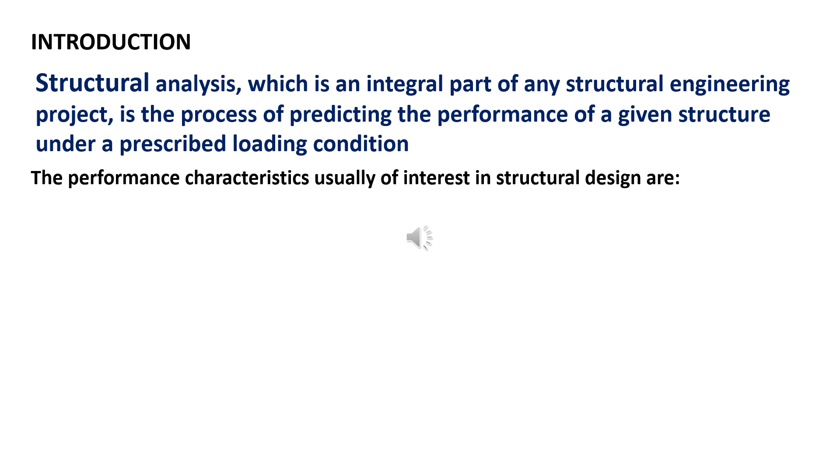The performance characteristics usually of interest in structural design are the following: first, we have the stresses or stress resultants, for example axial forces, shears, and bending moments; then followed by deflections.

Thus, the analysis of structure typically involves the determination of these quantities such as caused by the given loads and or other external effects such as support, displacement, and temperature changes.

Many commonly used structures such as beams, plane and space trusses, and rigid frames are classified as framed structures, also referred to as skeletal structures.

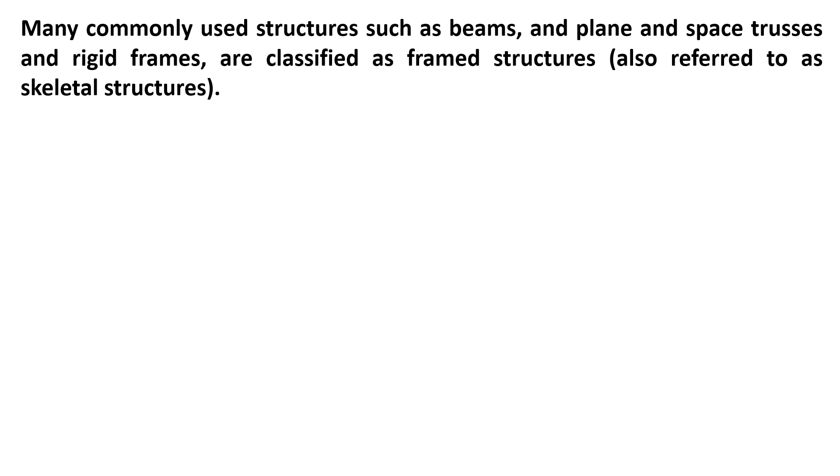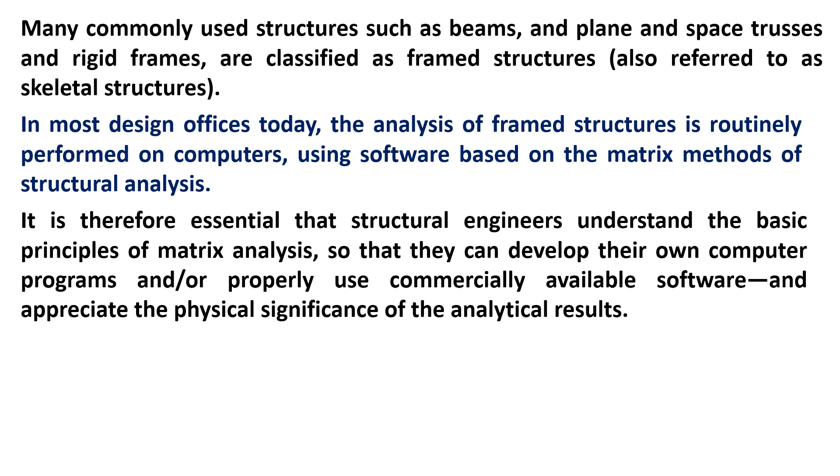In most design offices today, the analysis of frame structures is routinely performed on computers using software based on the matrix methods of structural analysis. It is therefore essential that structural engineers understand the basic principle of matrix analysis so that they can develop their own computer programs and/or properly use commercially available software and appreciate the physical significance of analytical results.

The objective of this text is to present the theory and computer implementation of matrix methods for the analysis of frame structures in static equilibrium.

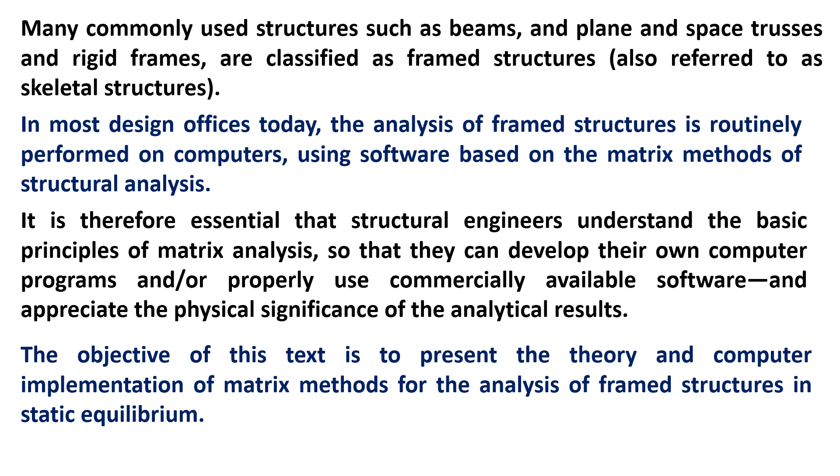Let us now have a historical background of the matrix analysis of structure. The theoretical foundation for matrix methods of structural analysis was laid by James Maxwell, who introduced the method of consistent deformations in 1864, and George Maney, who developed the slope deflection method in 1915. These classical methods are considered to be the precursors of the matrix flexibility and stiffness methods, respectively.

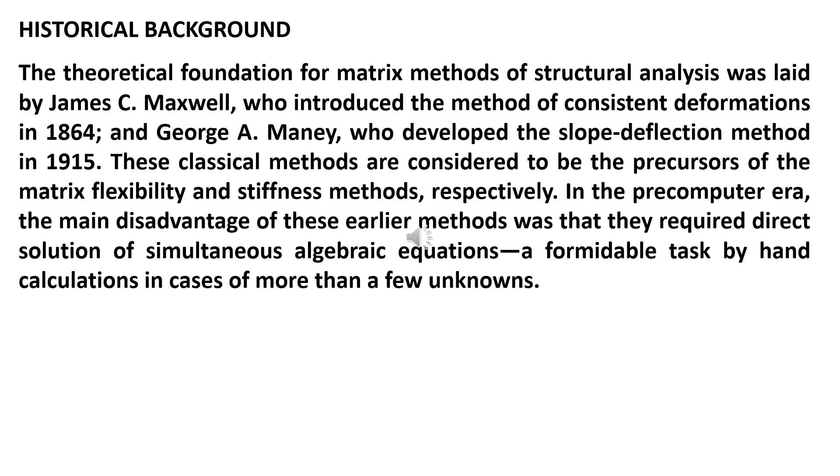In the pre-computer era, the main disadvantage of these earlier methods was that they required direct solution of simultaneous algebraic equations, a formidable task by hand calculations in cases of more than a few unknowns. The invention of computers in the late 1940s revolutionized structural analysis, as computers could solve large systems of simultaneous equations.

The analysis methods yielding solutions in that form were no longer at a disadvantage, but in fact were preferred because simultaneous equations could be expressed in matrix form and conveniently programmed for solutions on computers.

Mr. Levy is generally considered to have been the first to introduce the flexibility method in 1947 by generalizing the classical method of consistent deformations. Among the subsequent researchers who extended the flexibility method and expressed it in matrix form in the early 1950s were Falkenheimer, Langefors, and Denke. The matrix stiffness method was developed by Livesley in 1954.

In the same year, Argyris and Kelsey presented a formulation of matrix methods based on energy principles.

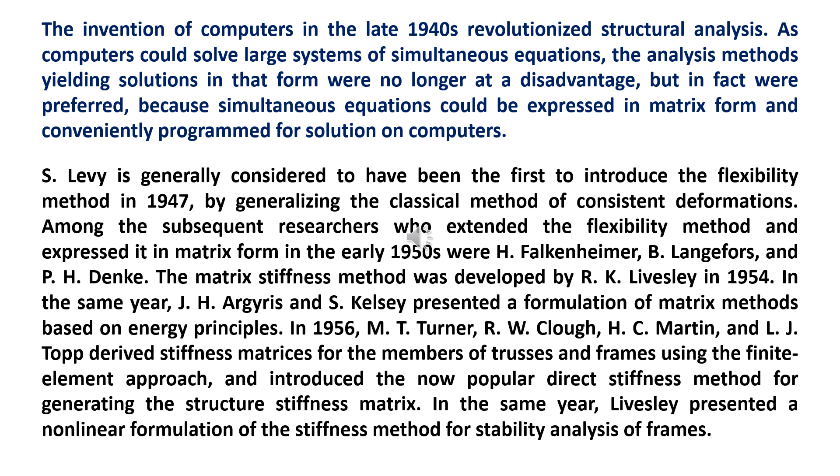In 1956, Turner, Clough, Martin, and Topp derived stiffness matrices for the members of trusses and frames using the finite element approach, and introduced the now popular direct stiffness method for generating the structure stiffness matrix. In the same year, Livesley presented a nonlinear formulation of the stiffness method for stability analysis of frames.

Since the middle of the 1950s, the development of matrix methods has continued at a tremendous pace, with research efforts in recent years directed mainly toward formulating procedures for the dynamic and nonlinear analysis of structures, and developing efficient computational techniques for analyzing large structures. Recent advances in these areas can be attributed to Mr. Archer, Birnstiel, Gallagher, Padlog, Przemieniecki, Wang, Wilson, and others.

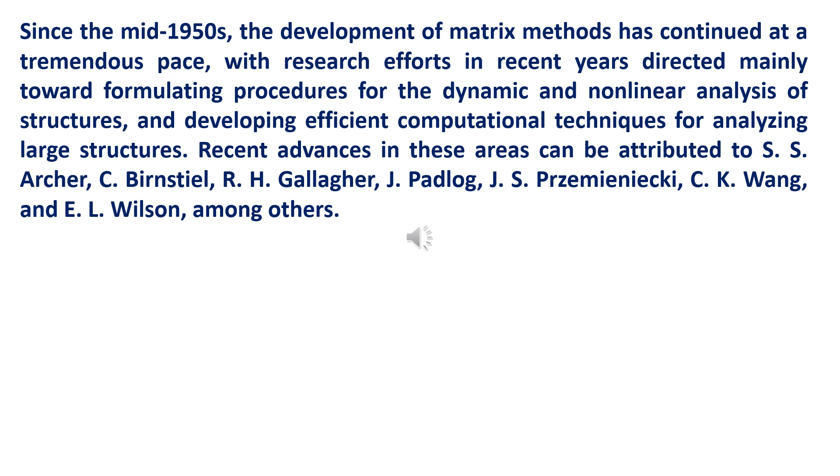We now have the classical, matrix, and finite element methods of structural analysis. To start with, let us have first the classical versus matrix methods.

As we develop matrix methods in subsequent chapters, learners who are familiar with classical methods of structural analysis will realize that both matrix and classical methods are based on the same fundamental principles, but that the fundamental relationships of equilibrium, compatibility, and member stiffness are now expressed in the form of matrix equations, so that numerical computations can be efficiently performed on a computer.

Most classical methods were developed to analyze particular types of structures, and since they were intended for hand calculations, they often involve certain assumptions to reduce the amount of computational effort required for analysis. The application of these methods usually requires an understanding on the part of the analyst of the structural behavior.

Consider, for example, the moment distribution method. This classical method can be used to analyze only beams and plane frames undergoing bending deformations. Deformations due to axial forces in the frames are ignored to reduce the number of independent joint translations.

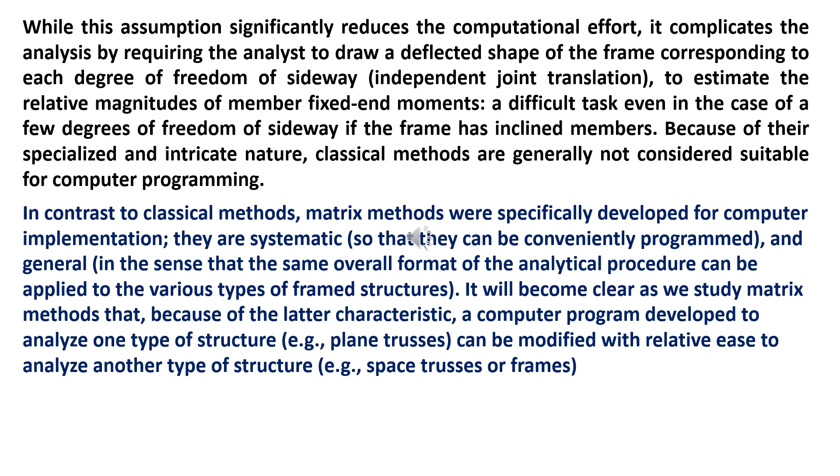As the analysis of large and highly redundant structures by classical methods can be quite time consuming, matrix methods are commonly used. However, classical methods are still preferred by many engineers for analyzing smaller structures because they provide better insight into the behavior of structures. Classical methods may also be used for preliminary designs, for checking the results of computerized analysis, and for deriving the member force displacement relations needed in the matrix analysis. Furthermore, a study of classical methods is considered essential for developing an understanding of structural behavior.

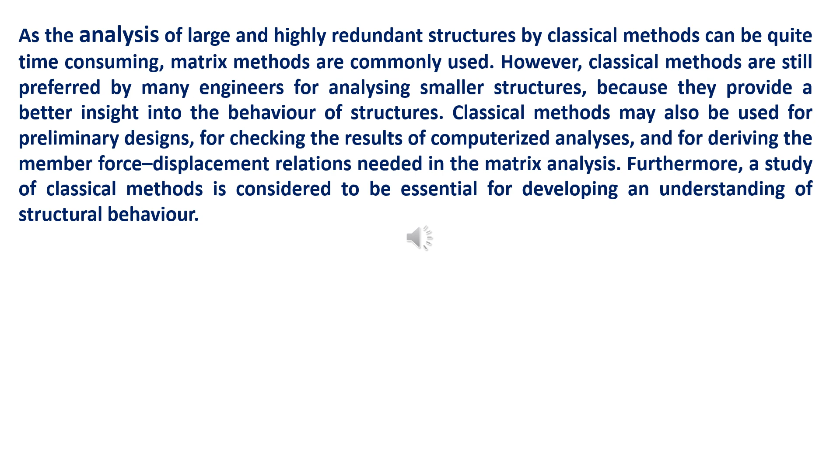Let us now look at matrix versus finite element methods.

Matrix methods can be used to analyze frame structures only. Finite element analysis, which originated as an extension of matrix analysis to surface structures, has now developed to the extent that it can be applied to structures and solids of practically any shape or form.

From a theoretical viewpoint, the basic difference between the two is that in matrix methods, the member force displacement relationships are based on the exact solutions of the underlying differential equations, whereas in finite element methods, such relations are generally derived by work energy principles from assumed displacement or stress functions.

Because of the approximate nature of its force displacement relations, finite element analysis generally yields approximate results. However, as will be shown in Chapters 3 and 5 of this subject, in the case of linear analysis of frame structures composed of prismatic uniform members, both matrix and finite element approaches yield identical results.

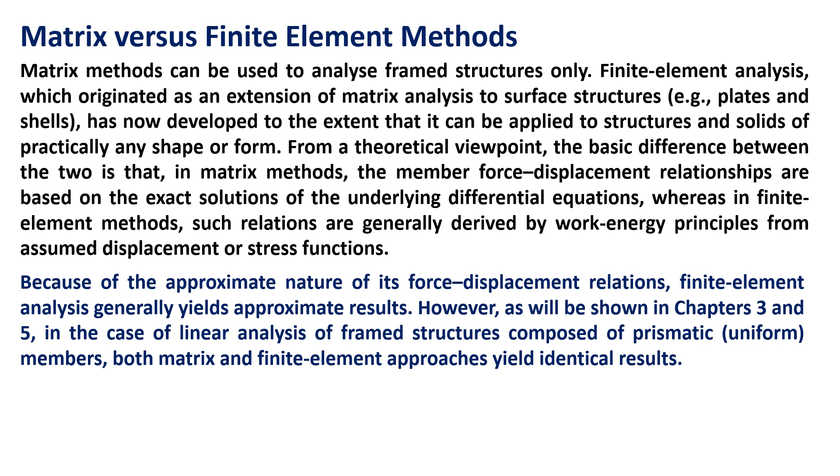Let us now discuss flexibility and stiffness methods. Two different methods can be used for the matrix analysis of structures: the flexibility method and the stiffness method. The flexibility method, also referred to as the force or compatibility method, is essentially a generalization in matrix form of the classical method of consistent deformations.

In this approach, the primary unknowns are the redundant forces, which are calculated first by solving the structure's compatibility equations. Once the redundant forces are known, the displacements can be evaluated by applying the equations of equilibrium and the appropriate member force displacement relations.

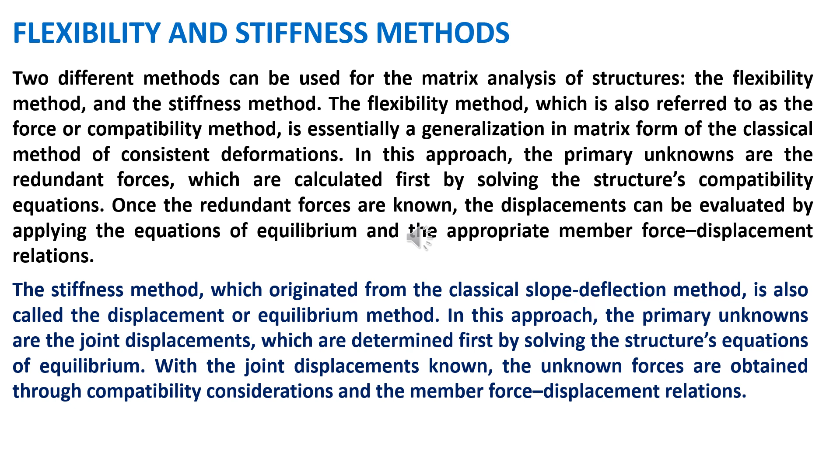The stiffness method, which originated from the classical slope deflection method, is also called the displacement or equilibrium method. In this approach, the primary unknowns are the joint displacements, which are determined first by solving the structure's equations of equilibrium. With the joint displacements known, the unknown forces are obtained through compatibility considerations and the member force displacement relations.

Although either method can be used to analyze frame structures, the flexibility method is generally convenient for analyzing small structures with few redundants. This method may also be used to establish member force displacement relations needed to develop the stiffness method. The stiffness method is more systematic and can be implemented more easily on computers. Therefore, it is preferred for the analysis of large and highly redundant structures.

Most of the commercially available software for structural analysis is based on the stiffness method. In this text, we focus our attention mainly on the stiffness method, with emphasis on a particular version known as the direct stiffness method, which is currently used in professional practice.

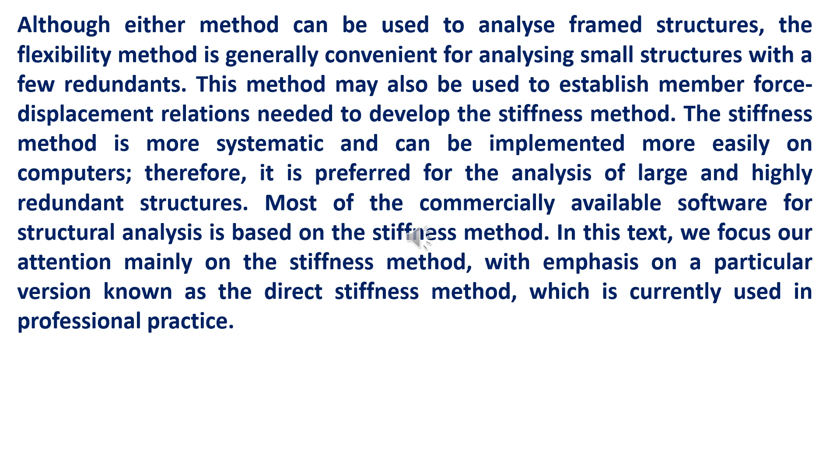We now turn to the classification of frame structures. Frame structures are composed of straight members whose lengths are significantly larger than their cross-sectional dimensions. Common frame structures can be classified into six basic categories based on the arrangement of their members and the types of primary stresses that may develop in their members under major design loads.

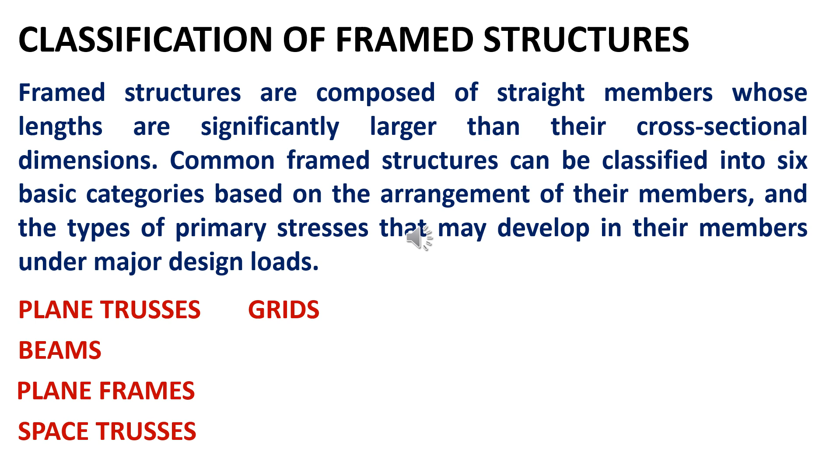First, we have the plane trusses, followed by the beams, and then we also have the plane frames, followed by the space trusses, and then we also have the grids, and lastly, we have the space frames.

Let's now have the definition of plane trusses. A truss is defined as an assemblage of straight members connected at their ends by flexible connections and subjected to loads and reactions only at the joints or connections. The members of such an ideal truss develop only axial forces when the truss is loaded.

In real trusses, such as those commonly used for supporting roofs and bridges, the members are connected by bolted or welded connections that are not perfectly flexible, and the dead weights of the members are distributed along their lengths. Because of these and other deviations from idealized conditions, truss members are subjected to some bending and shear. However, in most trusses these secondary bending moments and shears are small compared to the primary axial forces, and are usually not considered in their designs.

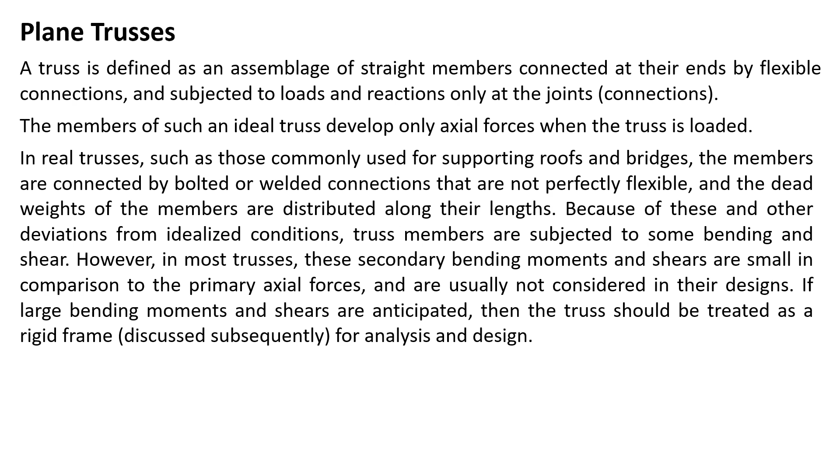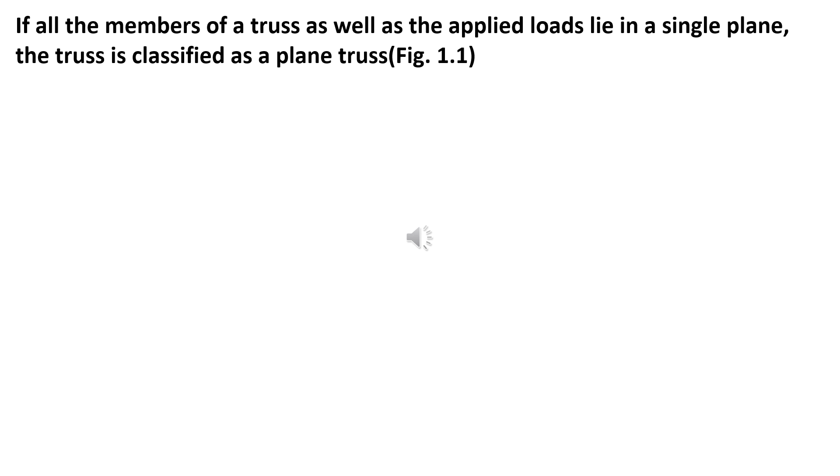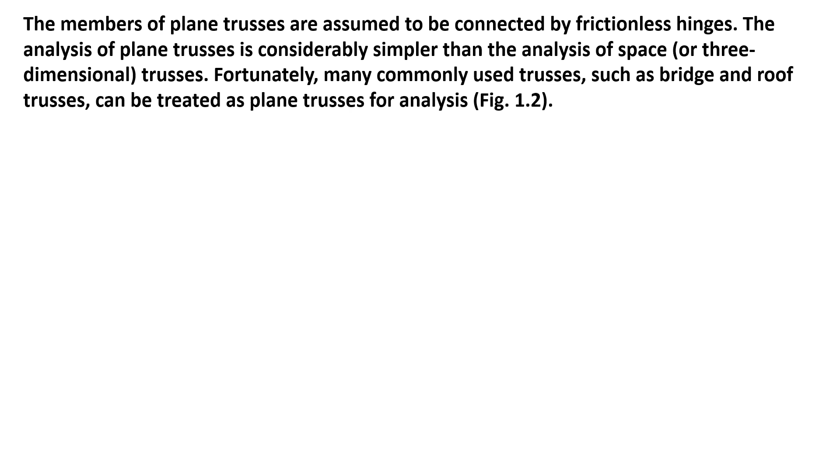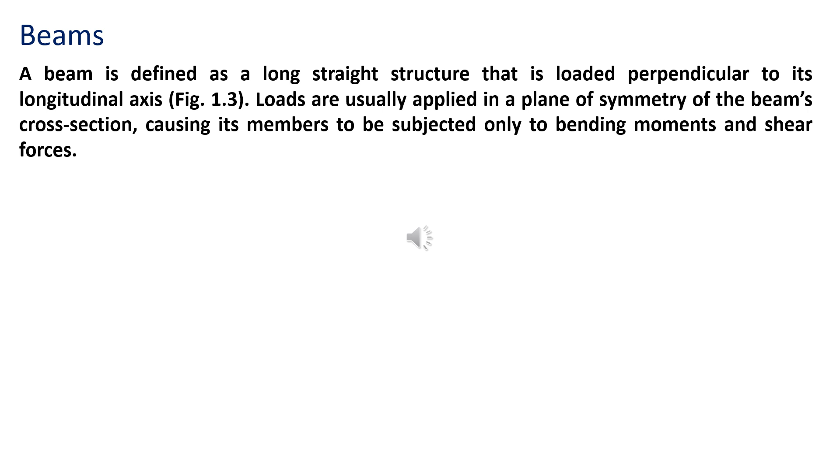Of course, we also have beams. A beam is defined as a long straight structure that is loaded perpendicular to its longitudinal axis. Loads are usually applied in a plane of symmetry of the beam's cross-section, causing its members to be subjected only to bending moments and shear forces. As shown below, Figure 1.3 is an example of a beam.

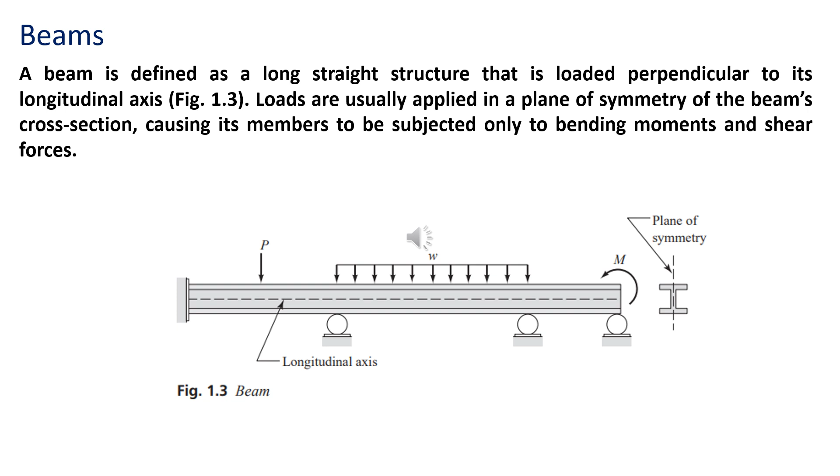Let's now have the definition of plane frames. Frames, also referred to as rigid frames, are composed of straight members connected by rigid and/or flexible connections, as shown in Figure 1.4 below. Unlike trusses, which are subjected to external loads only at the joints, loads on frames may be applied on the joints as well as on the members.

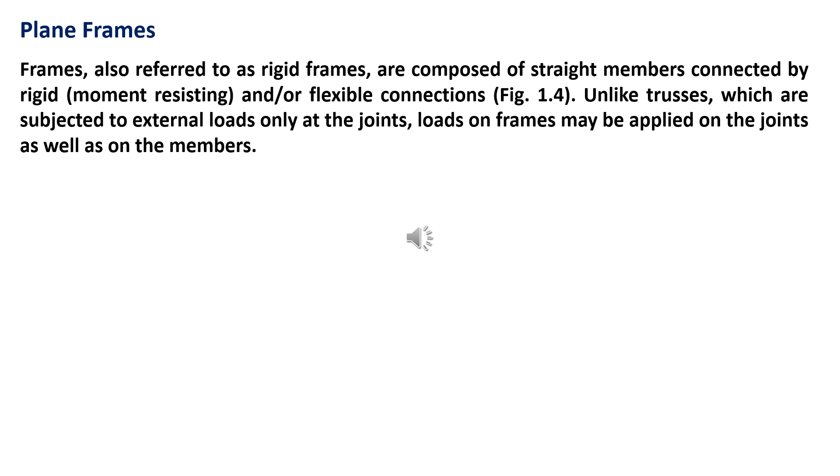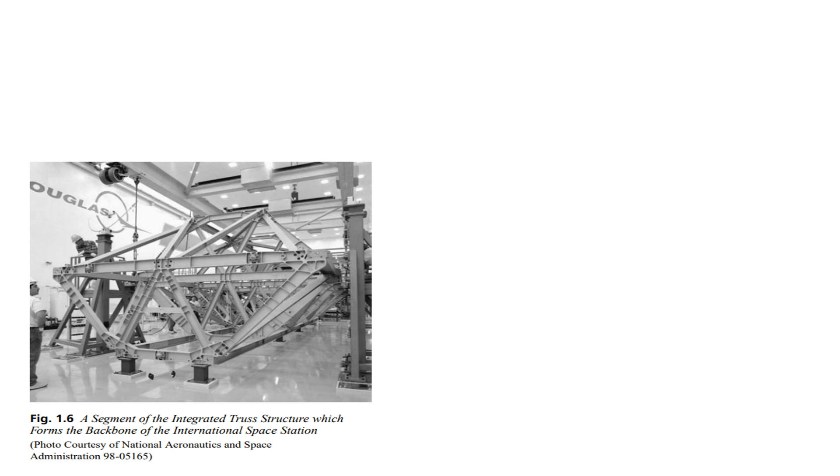Shown in Figure 1.6, this is an example of a segment of the integrated truss structure which forms the backbone of the International Space Station. And as shown below is an example of a grid, which is actually our Figure 1.7.

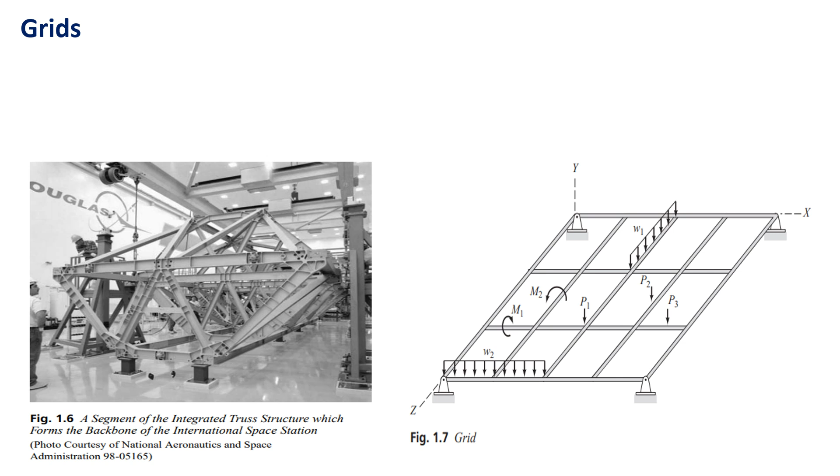Now let us talk about grids. How do we define grids? A grid, like a plane frame, is composed of straight members connected together by rigid and/or flexible connections to form a plane framework. The main difference between the two types of structures is that plane frames are loaded in the plane of the structure, whereas the loads on grids are applied in the direction perpendicular to the structure's plane.

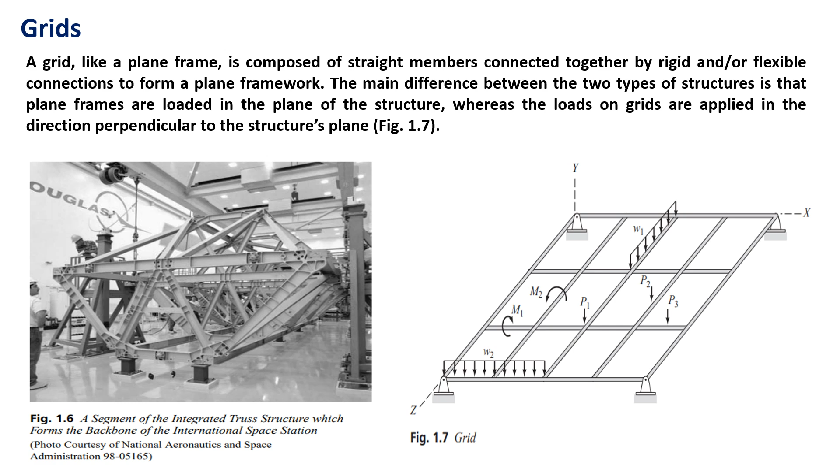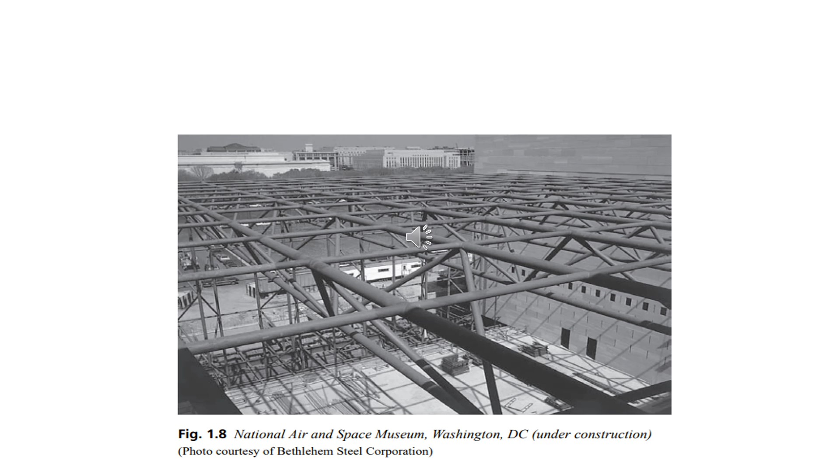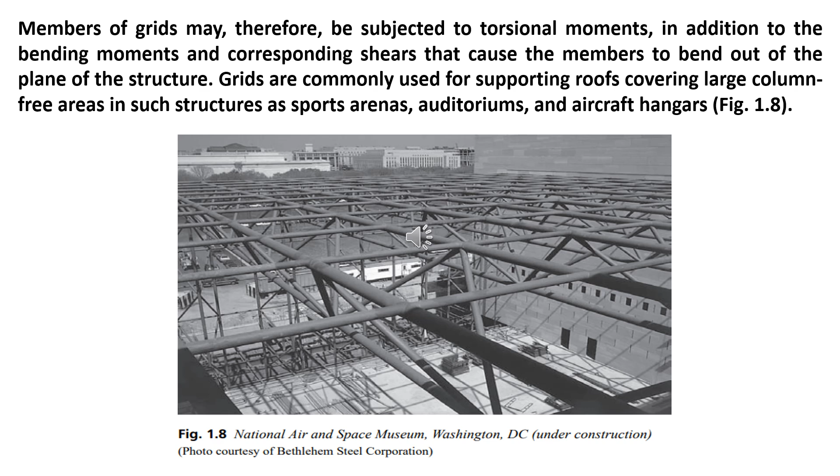Members of grids may therefore be subjected to torsional moments in addition to the bending moments and corresponding shears that cause the members to be bent out of the plane of the structure. Grids are commonly used for supporting roofs, covering large column-free areas in such structures as sports arenas, auditoriums, and aircraft hangars.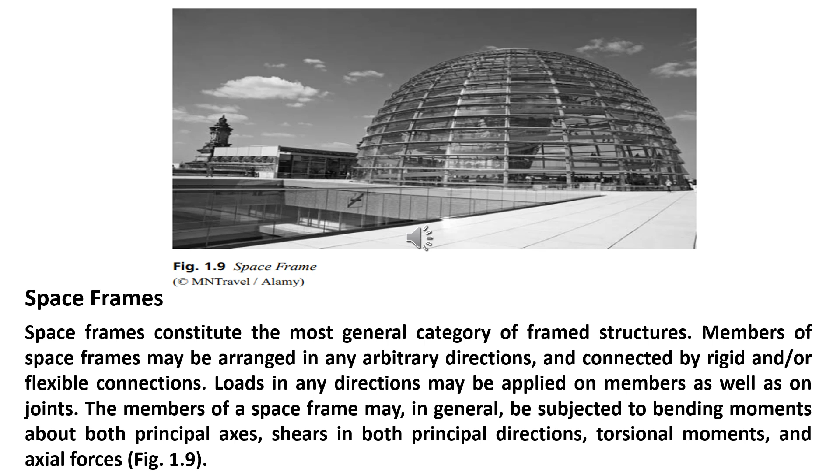Let us now talk about analytical models. The first, and perhaps most important, step in the analysis of a structure is to develop its analytical model. An analytical model is an idealized representation of a real structure for the purpose of analysis. Its objective is to simplify the analysis of a complicated structure by discarding much of the detail about connections, members, etc., that is likely to have little effect on the structure's behavioral characteristics of interest, while representing as accurately as practically possible the desired characteristics.

It is important to note that the structural response predicted from an analysis is valid only to the extent that the analytical model represents the actual structure.

For frame structures, the establishment of analytical models generally involves consideration of issues such as whether the actual three-dimensional structure can be subdivided into plane structures for the analysis, and whether to idealize the actual bolted or welded connection as pins, rigid, or semi-rigid joints.

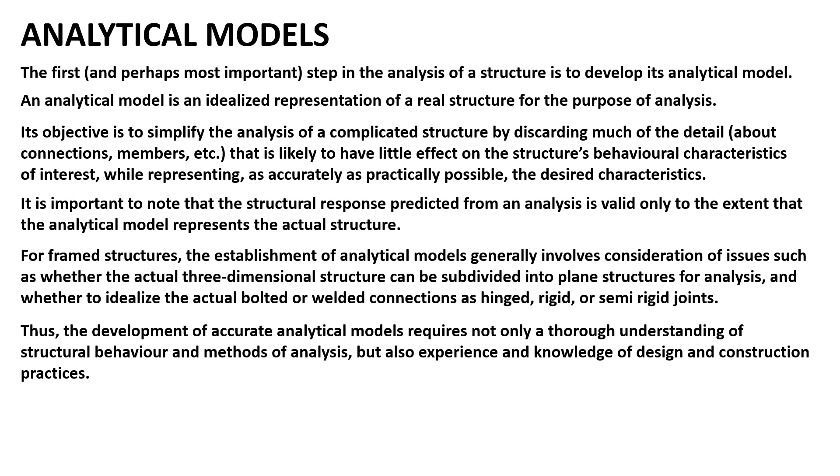Thus, the development of accurate analytical models requires not only a thorough understanding of structural behavior and methods of analysis, but also experience and knowledge of design and construction practices.

In matrix methods of analysis, a structure is modeled as an assemblage of straight members connected at their ends to joints.

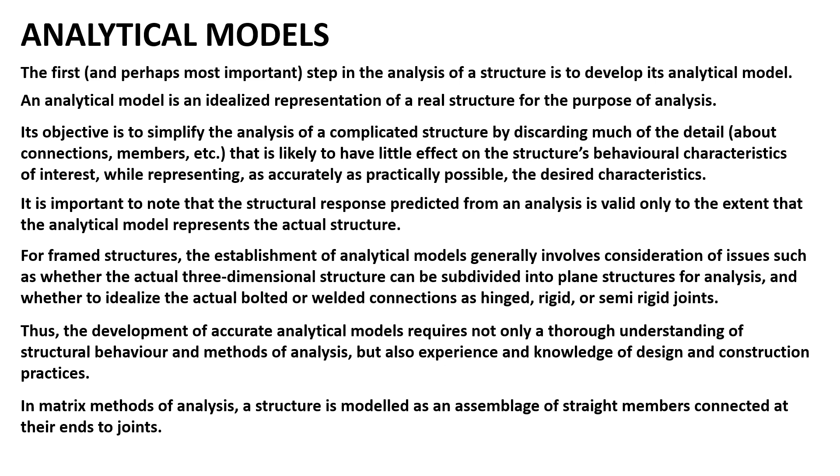A member is defined as part of the structure for which the member force displacement relationships to be used in the analysis are valid. The member force displacement relationships for the various types of frame structures will be derived in subsequent chapters.

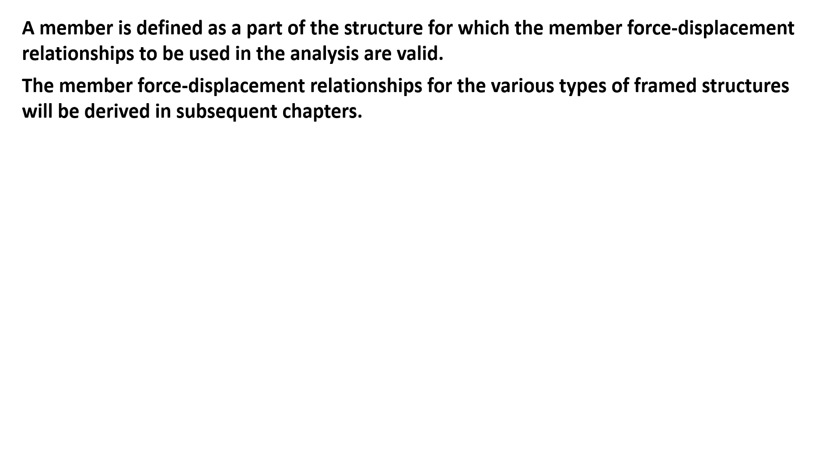A joint is defined as a structural part of infinitesimal size to which the ends of the members are connected. In finite element terminology, the members and joints of structures are generally referred to as elements and nodes respectively.

Supports for frame structures are commonly idealized as fixed supports, which do not allow any displacement, pin supports which allow rotation but prevent translation, or roller or link supports which prevent translation in only one direction.

Other types of restraints, such as those which prevent rotation but permit translation in one or more directions, can also be considered in an analysis, as discussed in subsequent chapter.

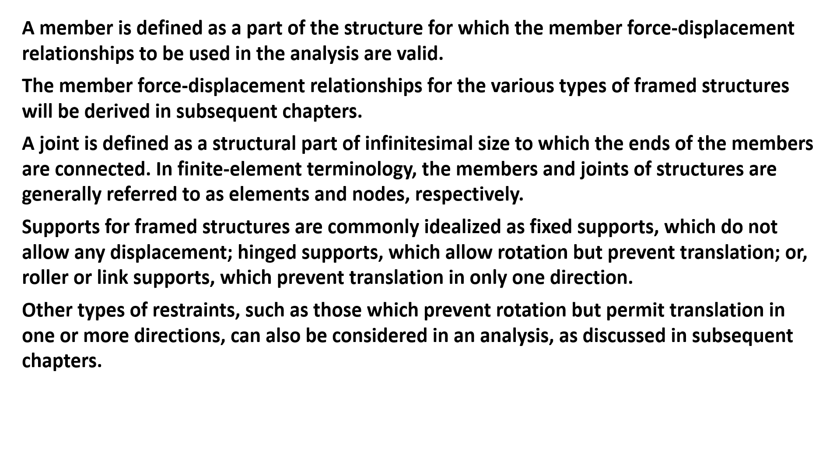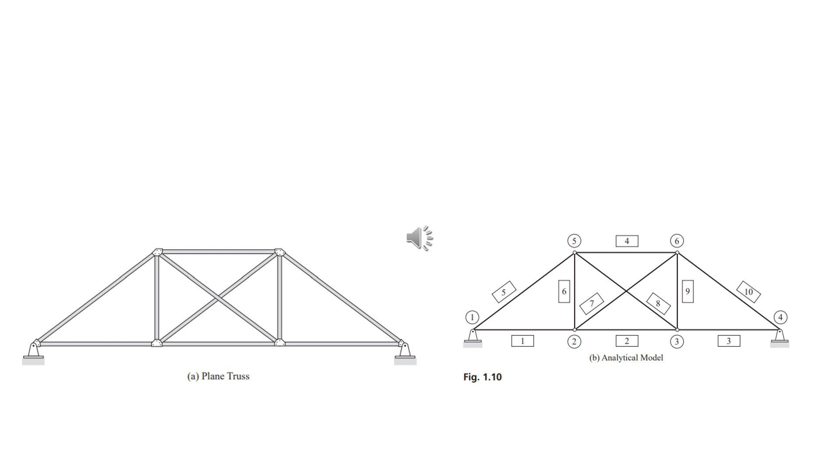As shown below is an example of a figure of a plane truss. And then for the second one, we have a figure of analytical model example.

With this, let us now talk about the line diagrams. The analytical model of a structure is represented by a line diagram, on which each member is depicted by a line coinciding with its centroidal axis.

The member dimensions and the size of connections are not shown. Rigid joints are usually represented by points, and hinge joints by small circles at the intersections of members. Each joint and member of the structure is identified by a number.

For example, the analytical model of the plane truss of figure 1.10a is shown in figure 1.10b, in which the joint numbers are enclosed within circles to distinguish them from the member numbers enclosed within rectangles.

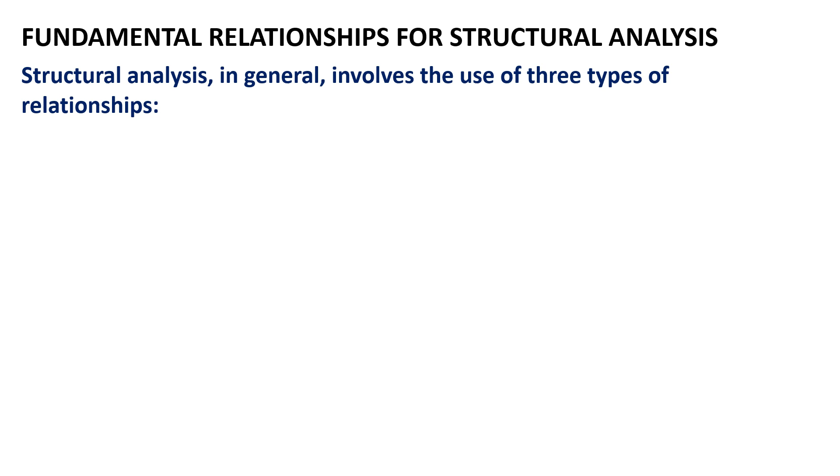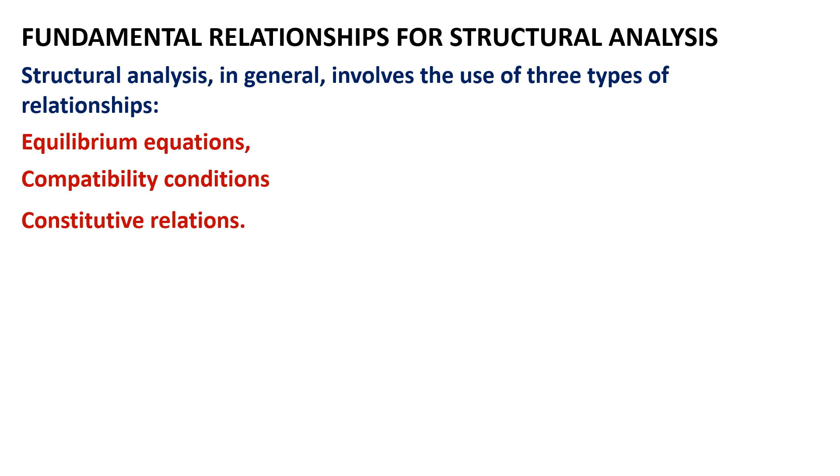Let us now have the fundamental relationships for structural analysis. Structural analysis in general involves the use of three types of relationships. At first, we have the equilibrium equations. Second, we have the compatibility conditions. And then finally, we have the constitutive relations.

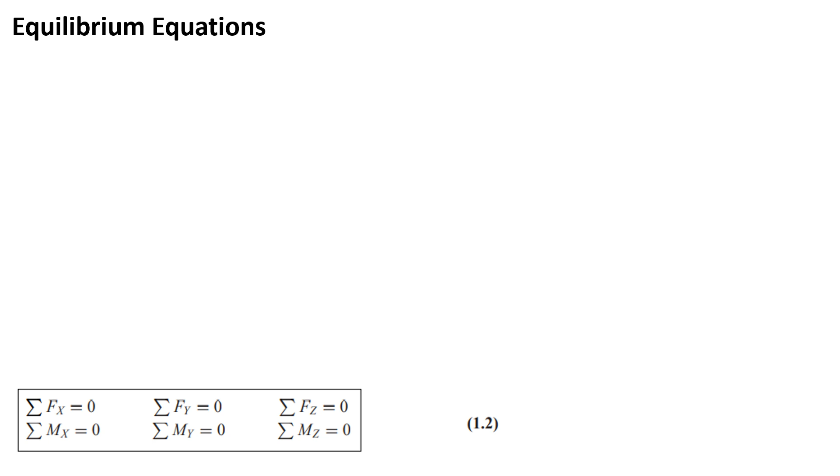For the first one, we have our equilibrium equations. A structure is considered to be in equilibrium if, initially at rest, it remains at rest when subjected to a system of forces and couples. If a structure is in equilibrium, then all of its members and joints must also be in equilibrium.

Recall from statics that for a plane, two-dimensional structure lying in the x and y plane, and subjected to a coplanar system of forces and couples, as we can see in figure 1.11, the necessary and sufficient conditions for equilibrium can be expressed in Cartesian xy coordinates as shown below.

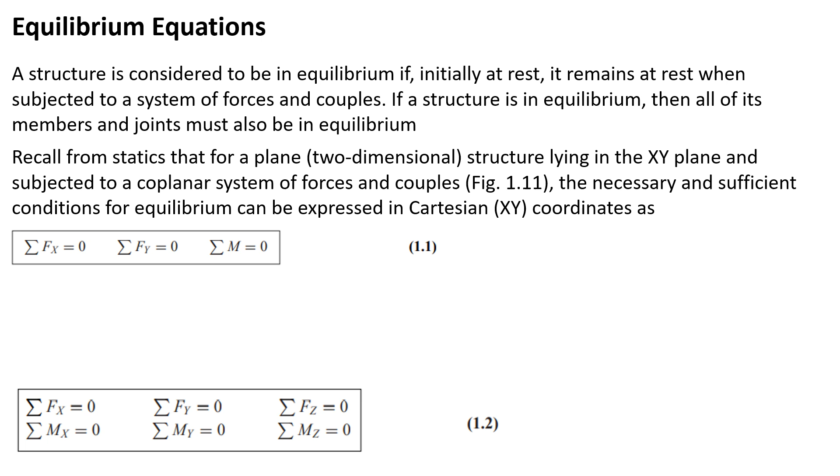We now have the summation of forces horizontal, or summation fx equals 0, summation of all forces vertical, or summation fy equals 0, and the summation of all the moments equals 0, or summation m equals 0. These equations are referred to as the equations of equilibrium for plane structures.

For a space, three-dimensional structure, subjected to a general three-dimensional system of forces and couples as shown in figure 1.12, the equations of equilibrium are expressed as summation fx equals 0, summation fy equals 0, summation fz equals 0, summation mx equals 0, summation my equals 0, and summation mz equals 0.

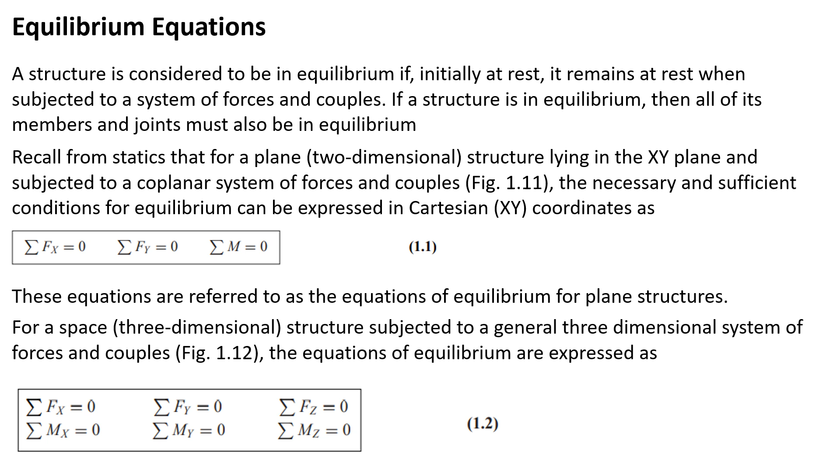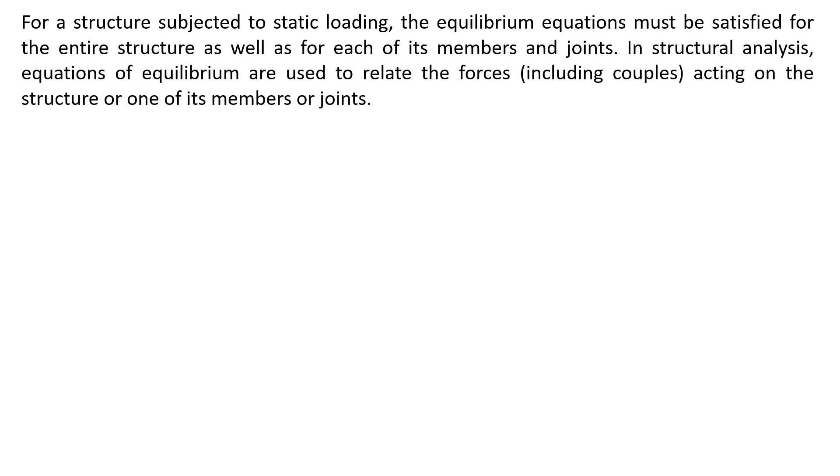For a structure subjected to static loading, the equilibrium conditions must be satisfied for the entire structure as well as for each of its members and joints. In structural analysis, equations of equilibrium are used to relate the forces acting on the structure or one of its members or joints.

For the second one, we have the compatibility conditions. Compatibility conditions relate the deformations of structures so that its various parts fit together without any gaps or overlaps. This condition ensures that the deformed shape of the structure is continuous and is consistent with the support conditions.

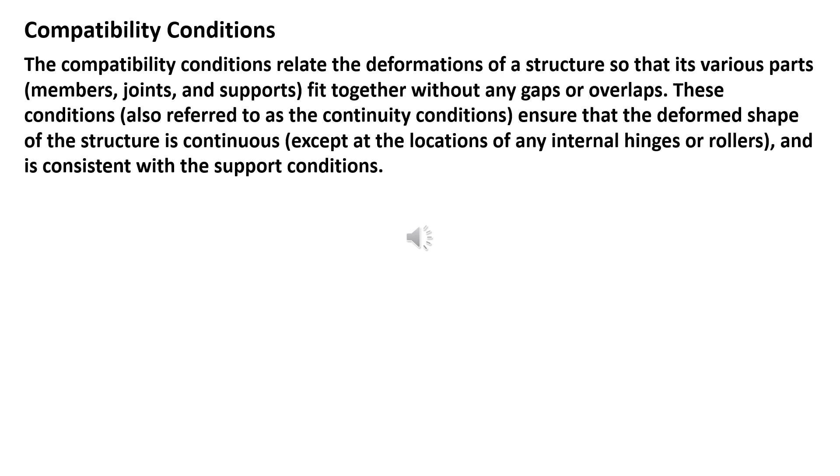When analyzing a structure, the compatibility conditions are used to relate member displacement to joint displacement, which in turn are related to the support conditions.

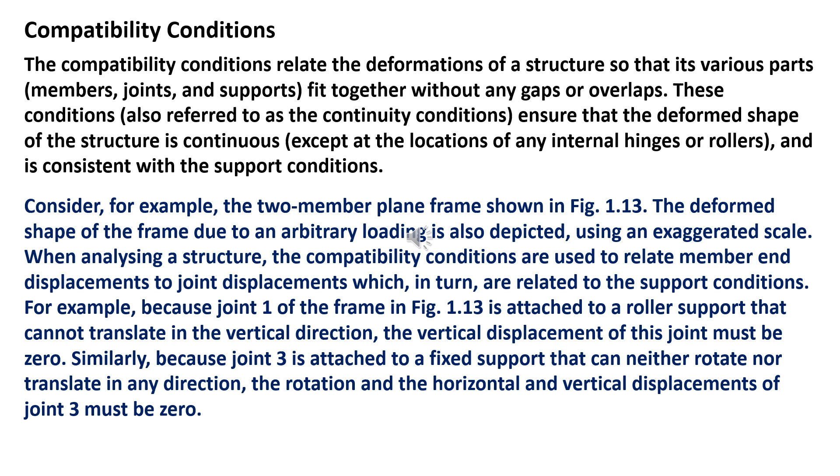The displacement of the ends of members are related to the joint displacement by the compatibility requirement that the displacement of a member end must be the same as the displacement of the joint to which the member end is connected. Thus, as shown in figure 1.13, because joint 1 of the example frame displaces to the right by a distance d sub 1...

and rotates clockwise by an angle theta 1, the left end of horizontal member 1, attached to joint 1, must also translate to the right by distance d sub 1 and rotate clockwise by angle theta 1. Similarly, because the displacement of joint 2 consists of translations d sub 2 to the right and d sub 3 downward, and the counterclockwise rotation theta 2, the right end of the horizontal member and the top end of the vertical member connected to joint 2 must also undergo the same displacement.

The bottom end of the vertical member, however, is not subjected to any displacement, because joint 3, to which this particular member end is attached, can neither rotate nor translate in any direction.

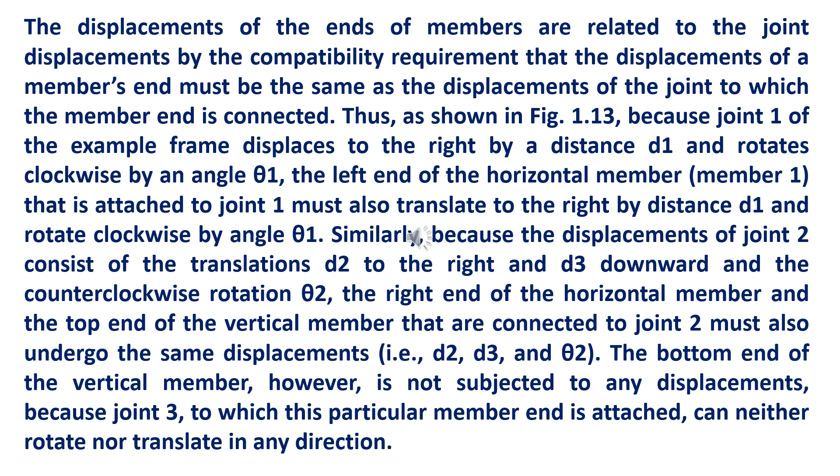Let's now have a view of our figure 1.13.

Finally, compatibility requires that the deflected shapes of the members of a structure be continuous, except at any internal hinges or rollers, and be consistent with the displacement at the corresponding ends of the members.

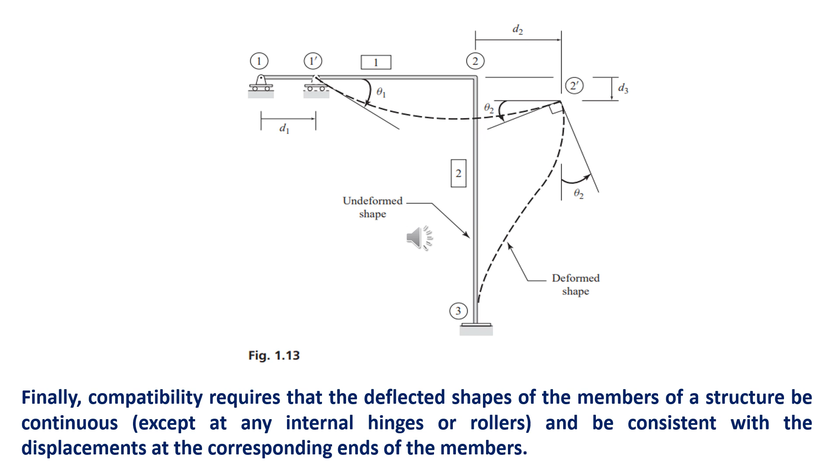For the third one, we have the constitutive relations. The constitutive relations, also referred to as the stress-strain relations, describe the relationships between the stresses and strains of a structure in accordance with the stress-strain properties of the structural material.

As discussed previously, the equilibrium equations provide relationships between the forces, whereas the compatibility conditions involve only deformations. The constitutive relations provide a link between the equilibrium equations and compatibility conditions that is necessary to establish the load-deformation relationships for a structure or a member.

In the analysis of frame structures, the basic stress-strain relations are used, along with member equilibrium and compatibility equations, to establish relationships between the forces and displacements at the ends of a member. The member force-displacement relations thus obtained are then treated as the constitutive relations for the entire structure and are used to link the structure's equilibrium and compatibility equations,

thereby yielding the load-deformation relationships for the entire structure. These load-deformation relations can then be solved to determine the deformations of the structure due to given loading.

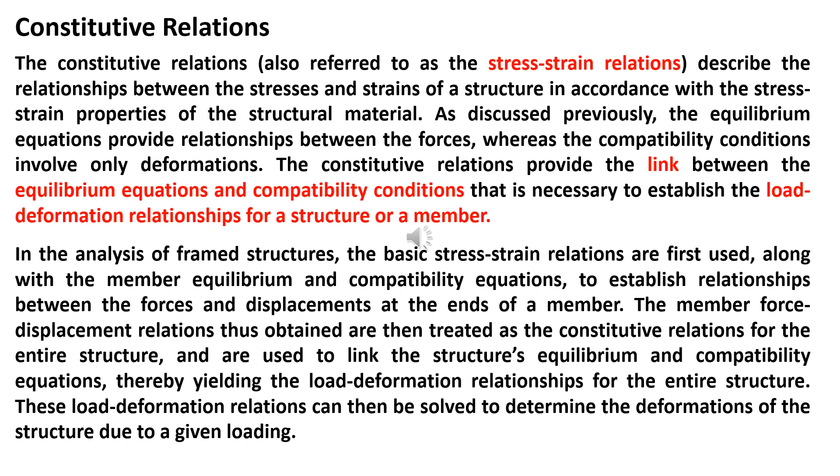The matrix methods presented in this text are formulated by the direct application of the equilibrium, compatibility, and constitutive relationships. However, to introduce readers to the finite element method and familiarize them with the application of work-energy principles, we also derive the member force-displacement relations for plane structures by a finite element approach that involves a work-energy principle known as the principle of virtual work.

In the following paragraphs, we review two statements of this principle pertaining to rigid bodies and deformable bodies for future reference. Let's now have the virtual work for rigid bodies, or the principle of virtual work for rigid bodies.

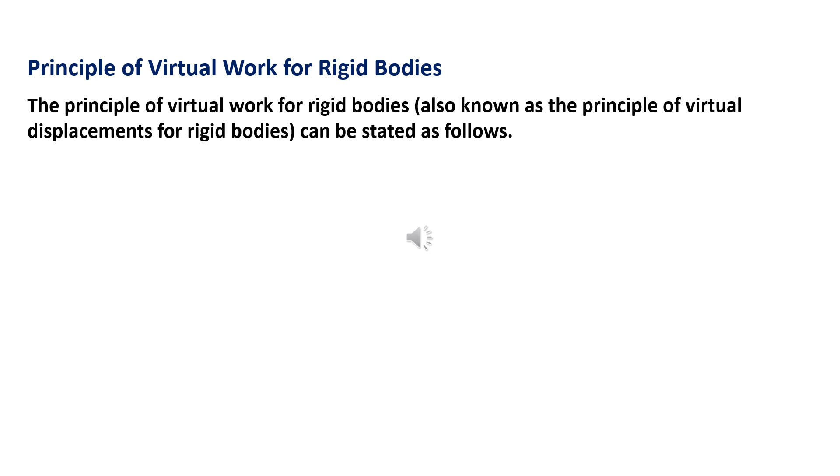The principle of virtual work for rigid bodies, also known as the principle of virtual displacement for rigid bodies, can be stated as follows: if a rigid body which is in equilibrium under a system of forces is subjected to any small virtual rigid body displacement, the virtual work done by the external forces is zero. In the foregoing statement, the term virtual simply means imaginary, not real.

Consider, for example, the cantilever beam shown in Figure 1.14a. The free body diagram of the beam is shown in Figure 1.14b, in which Px and Py are the components of the external load P in the x and y directions respectively, and R1, R2, and R3 represent the reactions at the fixed support 1.

Note that the beam is in equilibrium under the action of the forces Px, Py, R1, and R2, and the couple R3. Now, imagine that the beam is given an arbitrarily small virtual rigid body displacement from its initial equilibrium position 1-2 to another position 1-2, as shown in Figure 1.14c.

As this figure indicates, the total virtual displacement of the beam can be decomposed into rigid body translations in the x and y directions respectively, and a rigid body rotation about point 1. Note that a symbol like this is used here to identify the virtual quantities.

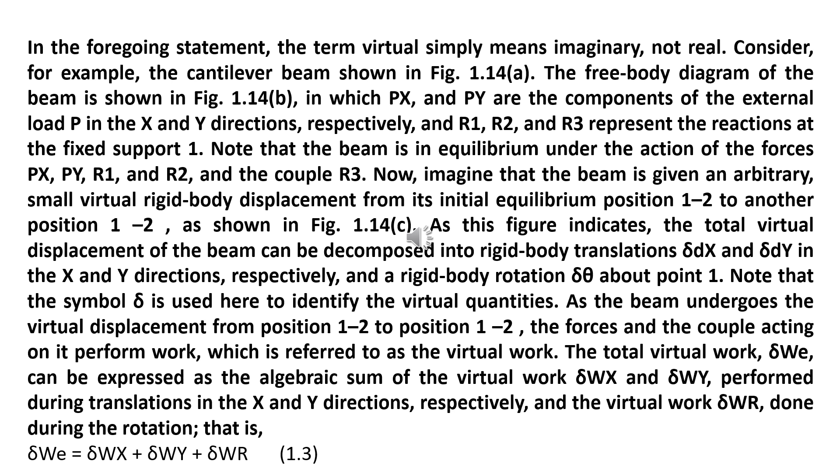Equation 1.4. Similarly, the virtual work done during the virtual translation is given by the formula shown below, equation 1.5. And the virtual work done by the forces and the couple during the small virtual rotation can be expressed as shown below, equation 1.6.

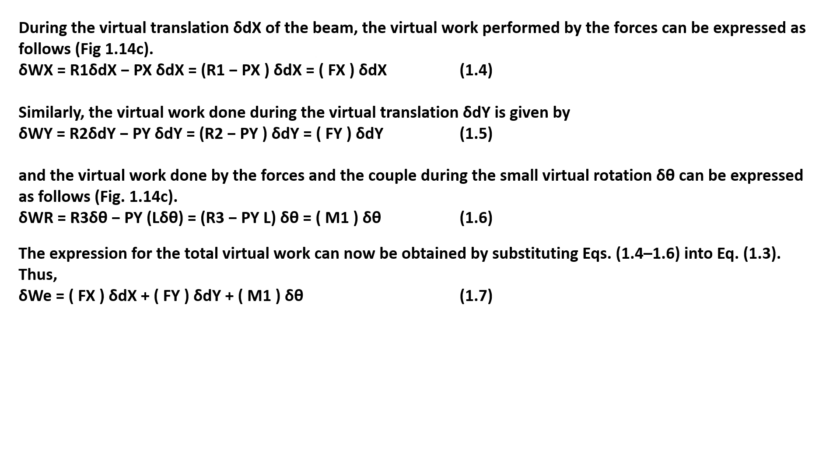The expression for the total virtual work can now be obtained by substituting equations 1.4 to 1.6 into equation 1.3. Thus, we have now the equation below, 1.7.

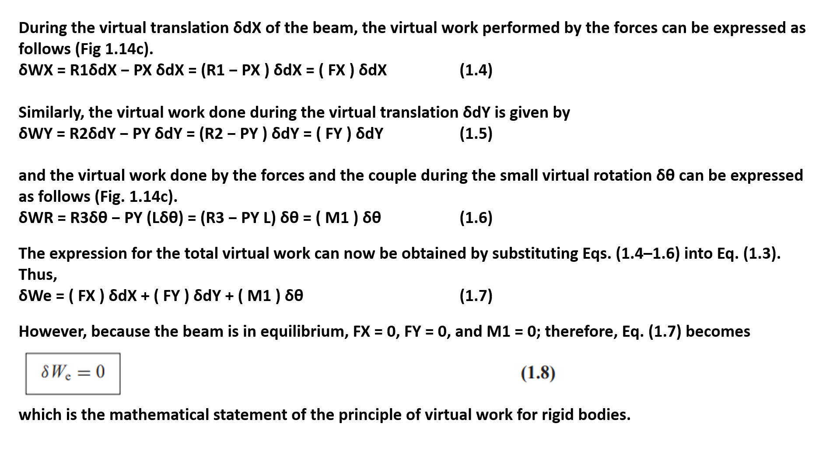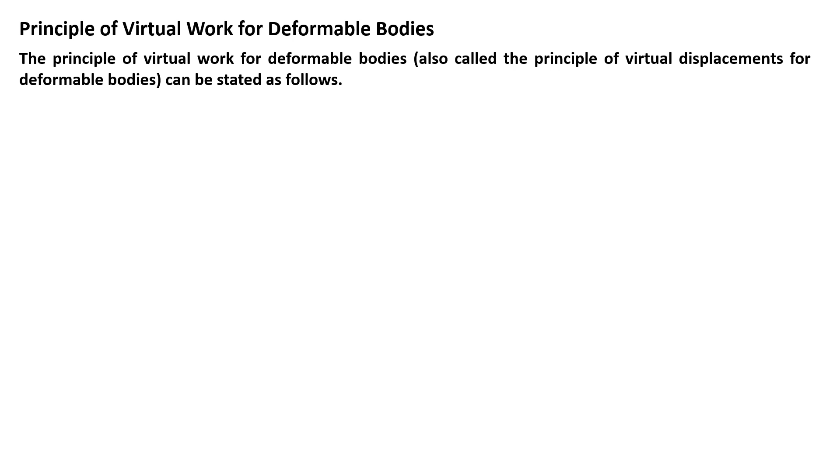Now let us have the principle of virtual work for deformable bodies. The principle of virtual work for deformable bodies, also known as the principle of virtual displacement for deformable bodies, can be stated as follows. If a deformable structure which is in equilibrium under a system of forces and couples is subjected to any virtual

displacement consistent with the support and continuity conditions of the structure, then the virtual external work done by the real external forces acting through the virtual external displacement is equal to the virtual strain energy stored in the structure.

To demonstrate the validity of this principle, consider the two-member truss as shown in Figure 1.15a, which is in equilibrium under the action of an external load P. The free body diagram of joint 3 of the truss is shown in Figure 1.15b.

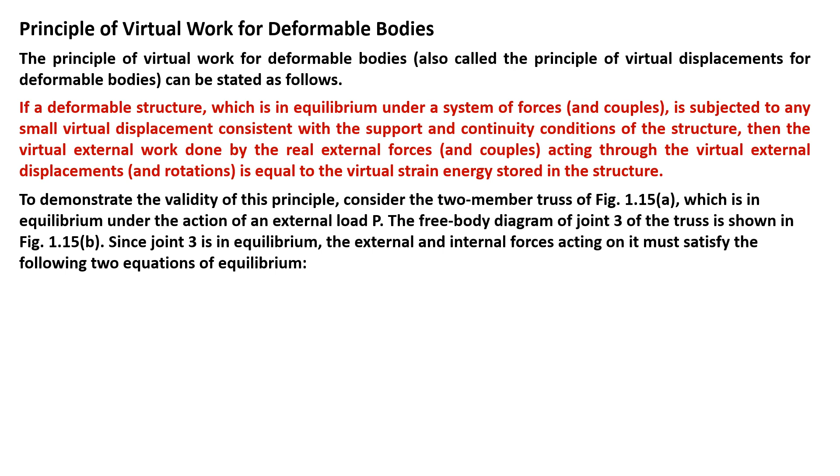Since joint 3 is in equilibrium, the external and internal forces acting on it must satisfy the following two equations of equilibrium. First, we have summation Fx equal to 0, wherein negative F sub 1 sine theta 1 plus F sub 2 sine theta 2 is equal to 0, followed by the second one, summation forces vertical equals 0, or summation Fy equals 0, F1 cosine theta 1 plus F2 cosine theta 2 minus P is equal to 0,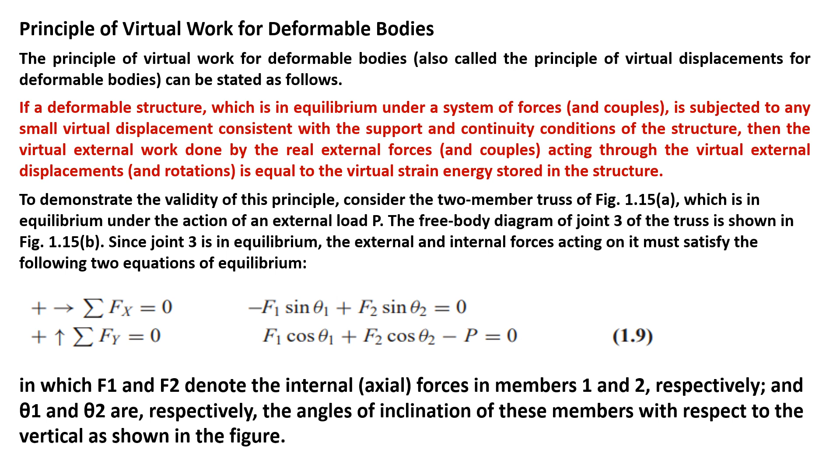in which F1 and F2 denote the internal axial forces in members 1 and 2, respectively, and theta 1 and theta 2 are, respectively, the angles of inclination of these members with respect to the vertical, as shown in the figure.

As mentioned here, we now have to imagine that joint 3 is given a small virtual compatible displacement in the downward direction, as shown in figure 1.15 letter A. It should be noted that this virtual displacement is consistent with the support conditions of the truss in the sense that joints 1 and 2, which are attached to supports, are not displaced.

Because the reaction forces at joints 1 and 2 do not perform any work, the total virtual work for the truss is equal to the algebraic sum of the virtual work of the forces acting at joint 3. That's from figure 1.15 letter B.

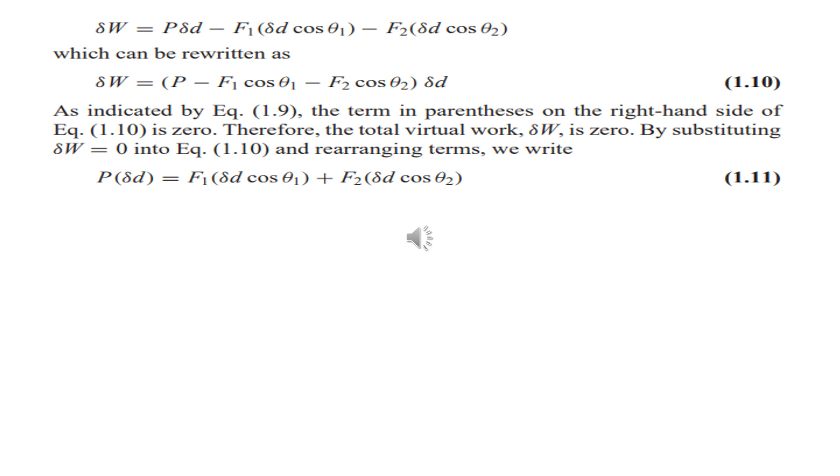Well, and then, as shown in the picture, we have the summary of our two equations, equation 1.10 and equation 1.11, in which the quantity on the left-hand side represents the virtual external work performed by the real external force P acting through the virtual external displacement.

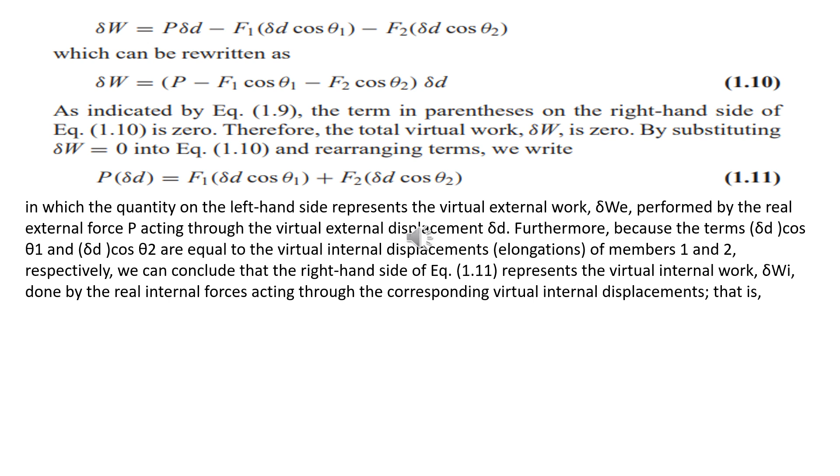Furthermore, because the terms are equal to the virtual internal displacement elongations of members 1 and 2, respectively, we can conclude that the right-hand side of equation 1.11 represents the virtual internal work done by the real internal forces acting through the corresponding virtual internal displacement. We actually have the summary of two equations, equation 1.12 and equation 1.13.

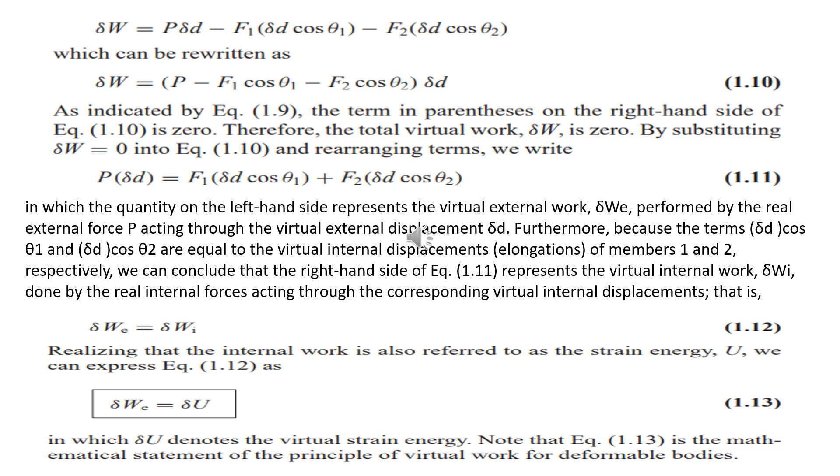For computational purposes, it is usually convenient to express equation 1.13 in terms of the stresses and strains in the members of the structure. For that purpose, let us consider a differential element of a member of an arbitrary structure subjected to a general loading, as shown in figure 1.16.

The element is in equilibrium under a general three-dimensional stress condition due to the real forces acting on the structure. Now, as the structure is subjected to a virtual displacement, virtual strains develop in the element, and the internal forces due to the real stresses perform virtual internal work as they move through the internal displacement caused by the virtual strains.

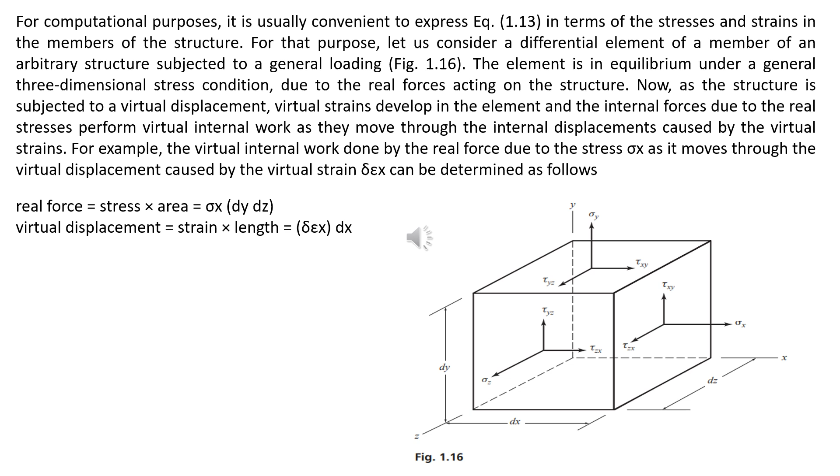For example, the virtual internal work done by the real force due to the stress as it moves through the virtual displacement caused by the virtual strain can be determined as follows. Let us have the following formulas, wherein real force is equal to the product of stress and area, while virtual displacement is equal to strain times the length.

As we can see now, we have the virtual internal work formula, real force times virtual displacement, followed by the virtual internal work in element dV, as shown in equation 1.14.

We also have the total virtual internal work, or the virtual strain energy stored in the entire structure, which can be obtained by integrating equation 1.14 over the volume V of the structure. Thus we have this equation, known as equation 1.15.

Finally, by substituting equation 1.15 into equation 1.13, we obtain the statement of the principle of virtual work for deformable bodies in terms of the stresses and strain of the structure. You can see now equation 1.16 as shown below.

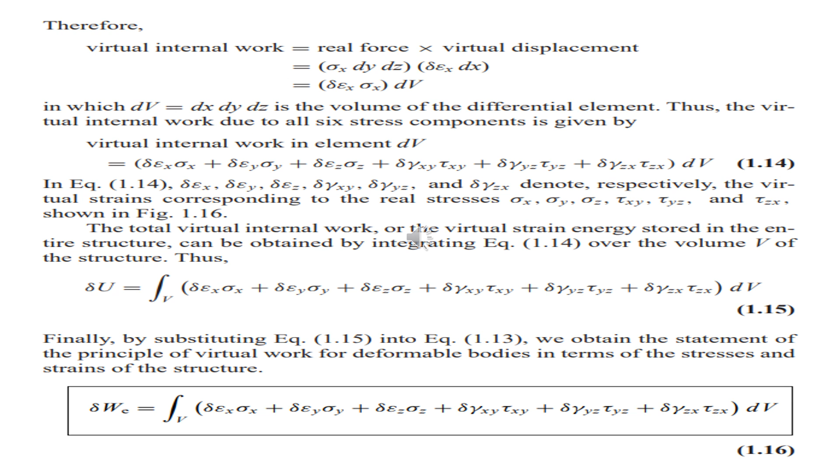Now, let us have a talk about linear versus nonlinear analysis. In this text, we focus our attention mainly on linear analysis of structures.

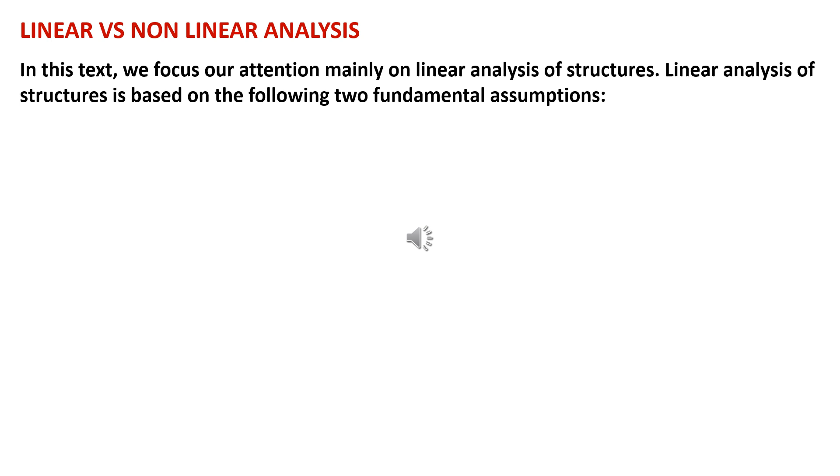Linear analysis of structures is based on two fundamental assumptions. First, the structures are composed of linearly elastic material, that is, the stress-strain relationship for the structural material follows Hooke's law. Second, the deformations of the structures are so small that the squares and higher powers of member slopes, rotations, and axial strains are negligible in comparison with unity, and the equations of equilibrium can be based on the undeformed geometry of the structure.

The reason for making this assumption is to obtain linear relationships between applied loads and the resulting structural deformations. An important advantage of linear force-deformation relations is that the principle of superposition can be used in the analysis. This principle states essentially that the combined effect of several loads acting simultaneously on a structure equals the algebraic sum of the effects of each load acting individually on the structure.

Engineering structures are usually designed so that under service loads, they undergo small deformations with stresses within the initial linear portions of the stress-strain curves of their materials. Thus, linear analysis generally proves adequate for predicting the performance of most common types of structures under service loading conditions.

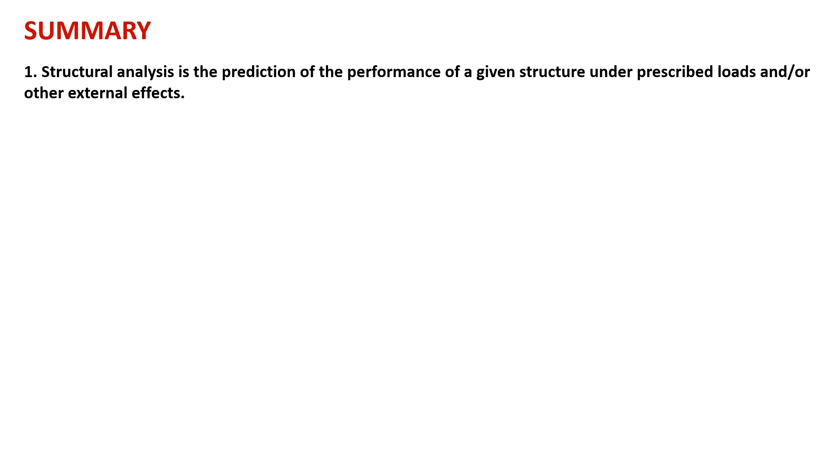And for the summary of our entire discussion in this chapter 1, these are the following. Structural analysis is the prediction of the performance of a given structure under prescribed loads and/or other external effects.

Both matrix and classical methods of structural analysis are based on the same fundamental principles. However, classical methods were developed to analyze particular types of structures, whereas matrix methods are more general and systematic so that they can be conveniently programmed on computers.

Two different methods can be used for matrix analysis of structures, namely the flexibility and stiffness methods. The stiffness method is more systematic and can be implemented more easily on computers, and is therefore currently preferred in professional practice.

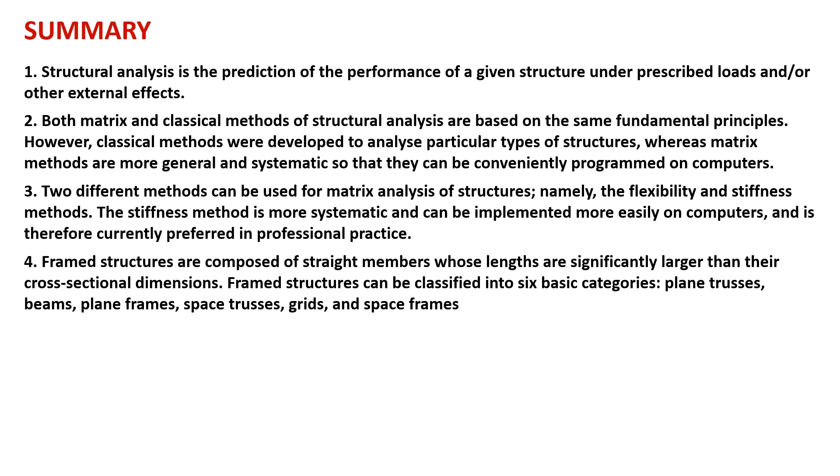Frame structures are composed of straight members whose lengths are significantly larger than their cross-sectional dimensions. Frame structures can be classified into six basic categories, such as plane trusses, beams, plane frames, space trusses, grids, and space frames.

An analytical model is a simplified or idealized representation of a real structure for the purpose of analysis. Frame structures are modeled as assemblages of straight members connected at their ends to joints, and these analytical models are represented by line diagrams.

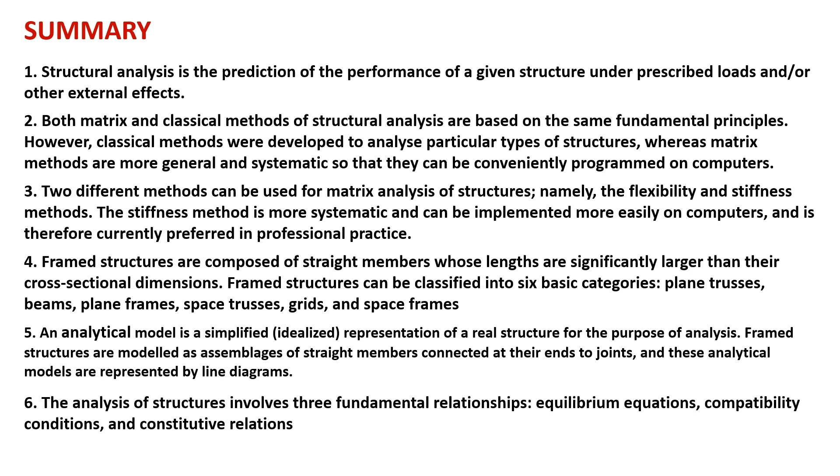The analysis of structures involves three fundamental relationships: the equilibrium equations, compatibility conditions, and constitutive relations.

The principle of virtual work for deformable bodies states that if a deformable structure, which is in equilibrium, is subjected to a small compatible virtual displacement, then the virtual external work is equal to the virtual strain energy stored in the structure.

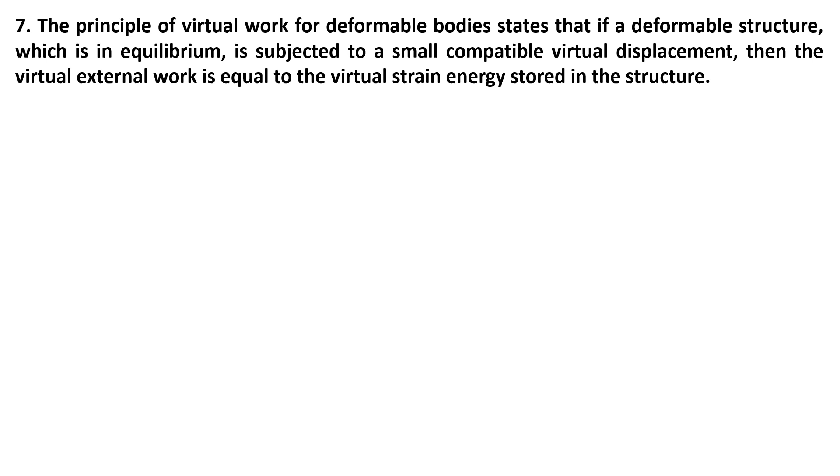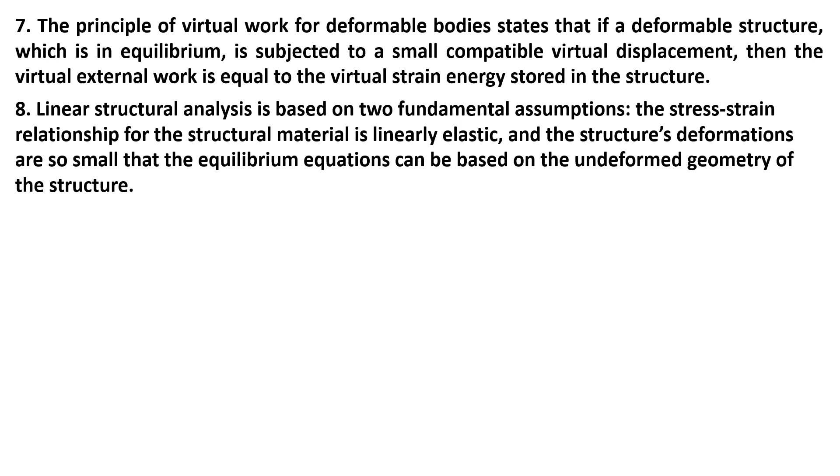Linear structural analysis is based on two fundamental assumptions: first, the stress-strain relationship for the structural material is linearly elastic, and second, the structure's deformations are so small that the equilibrium equations can be based on the undeformed geometry of the structure.